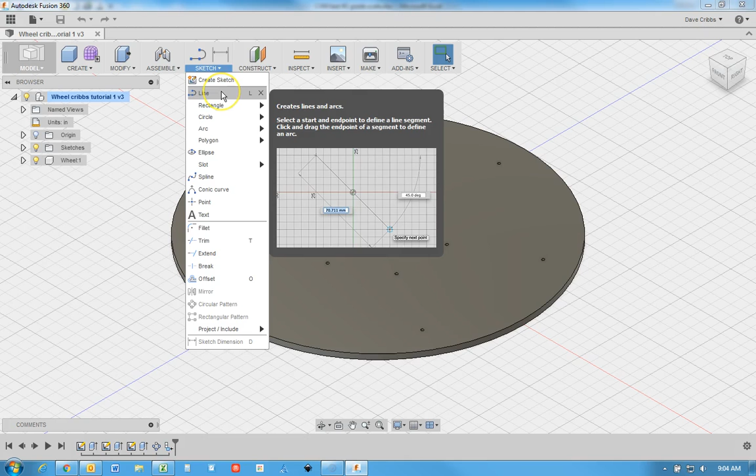First thing we want to do is create a new sketch on our drawing. We'll do it right here on the top surface. We'll go ahead and use this horizontal line as a reference. We'll start out here, go vertically upwards, come back down here at a good angle, and then back right there.

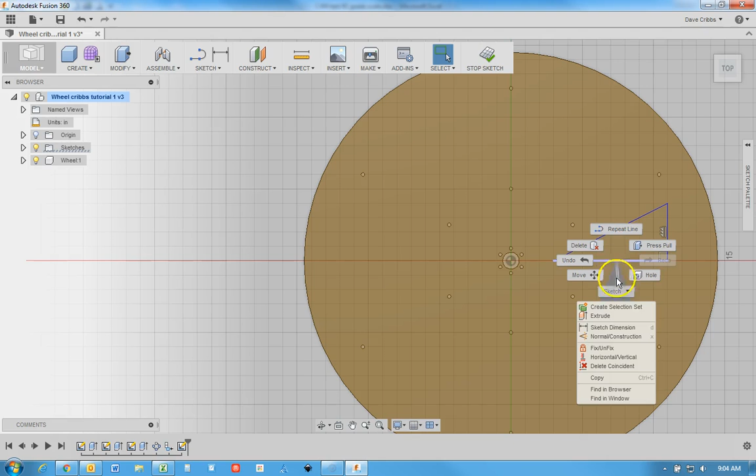Right click and hit OK. I'm going to turn this line segment into a construction geometry, and now I can use that. It won't show up as a profile line, but it'll show up that I can use it to do different things. I'm going to go ahead and mirror this line.

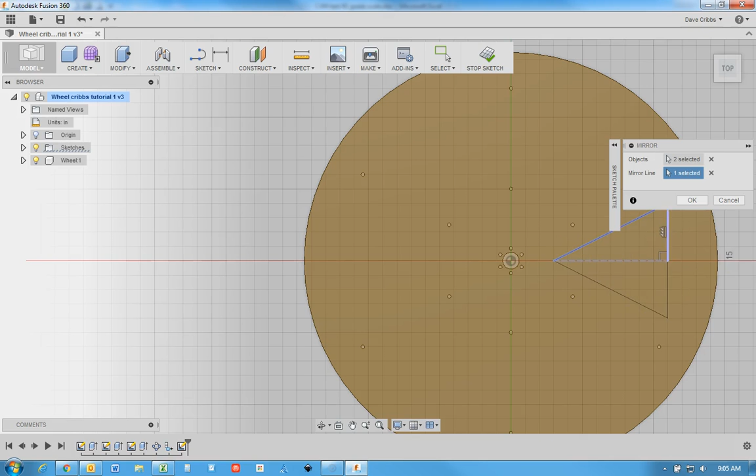Shift select this line about this geometry line. So now it makes both of those over there as well. It mirrors whatever I selected in the sketch, and I'll hit OK.

So now when I select this, this is just one volume. This is just a reference line. The sketch doesn't see it as part of the profile. So now I can hit Stop Sketch.

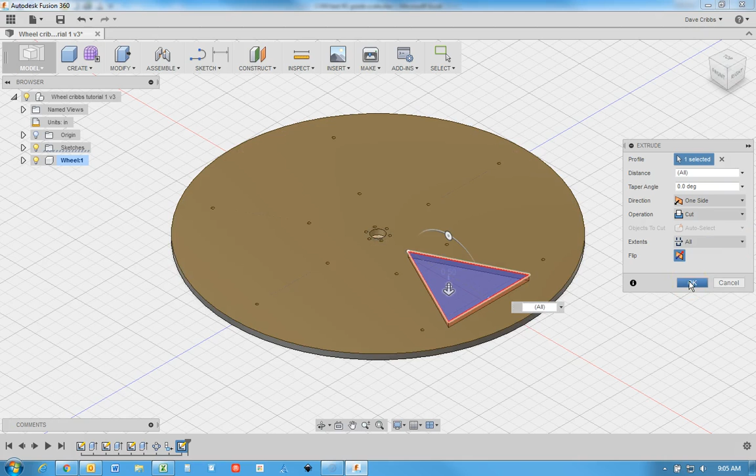I can select that geometry, right click, and do Press Pull. I want to go through my wheel. I'm just going to go through all sides, that way if we change the thickness of the wheel, this will go through. I'm going to hit OK.

The next thing I want to do is create another circular pattern. It asks me for what I want to select. I can come down here and select that extrusion, and I'll do pattern features is what I need, and select that extrusion. The axis will be the center axis of the wheel. I want to do 6 of them, and then OK. So there's all the spokes in the wheel.

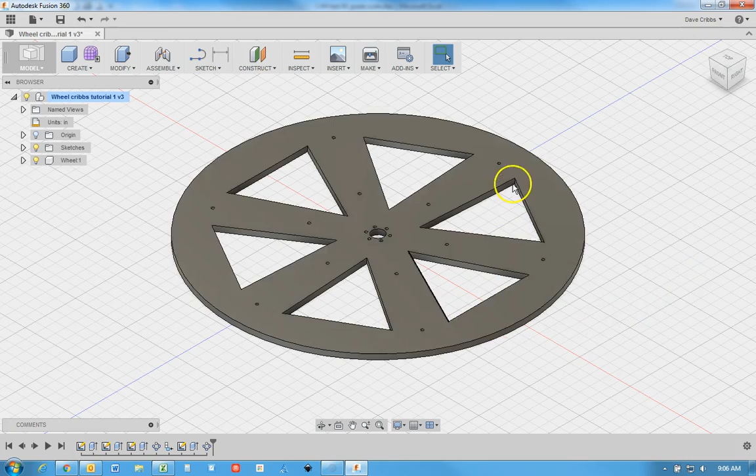You can come in here and add fillets to all these corners. I'm actually going to go ahead and delete that circular pattern.

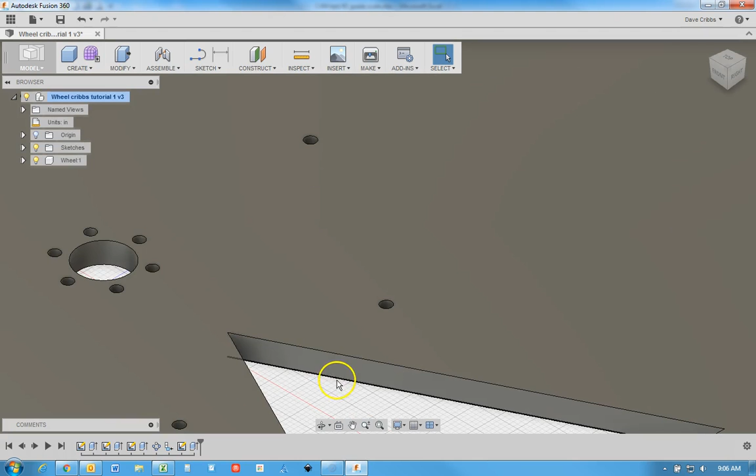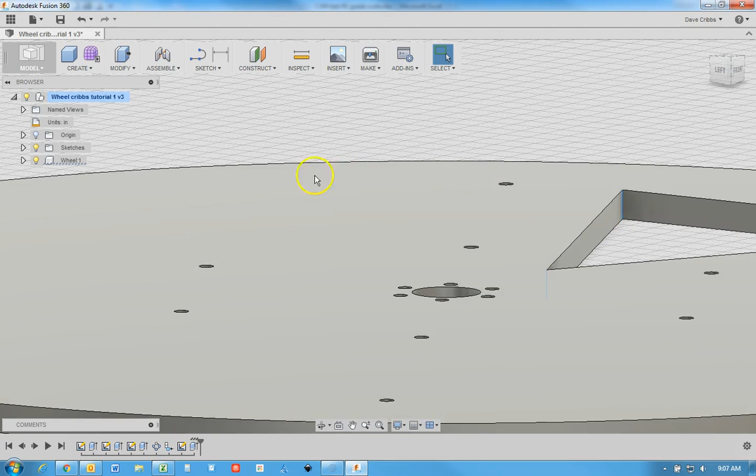I'm going to add the fillets to this before I make the pattern. I want that line right there, that vertex, and then this vertex. Once I have all 3 of those vertexes, I can come in here to modify, do the fillet.

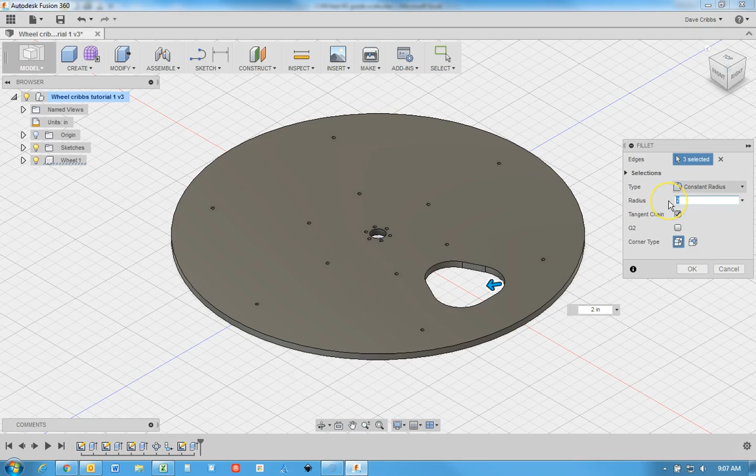We want a nice big fillet, we'll say maybe 1 inch. Let me come back up here to my view cube so I can see what that looks like. We might have even done 2 inches. Maybe too much, 1.5 inches. Okay, we'll just leave it like 1 inch. We'll go ahead and OK.

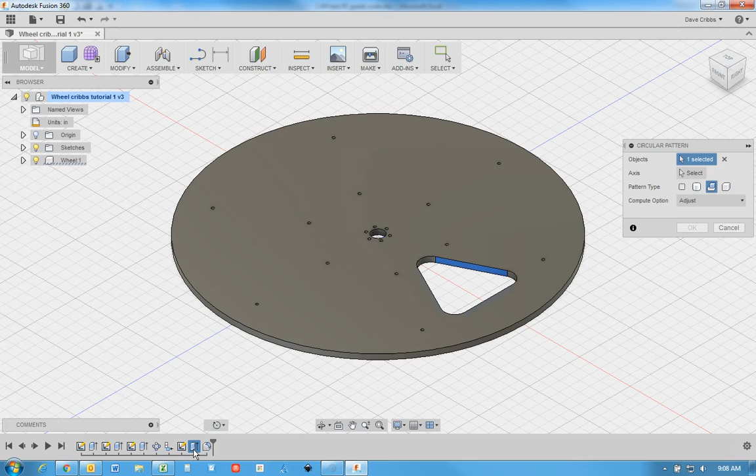The important idea is just to know how to do it. So now we'll come back here again to create our circular pattern. I want to select not only the extrusion, but I want to shift select the fillet as well. I'll select the center axis, do 6 of them. There you go. Now it's already got the rounded profile.

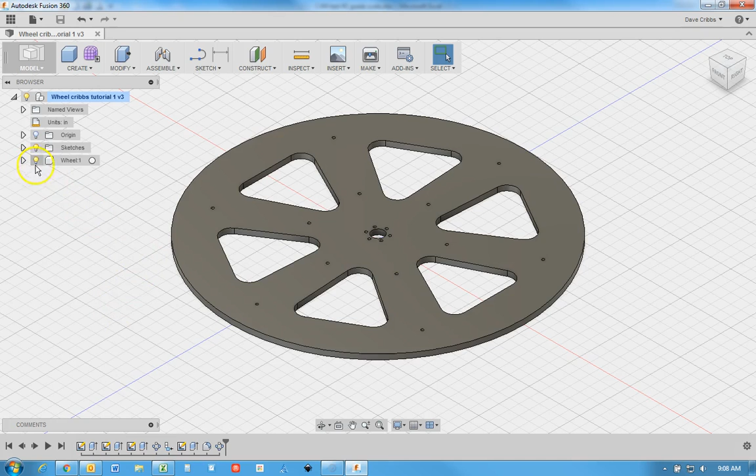So go ahead and hit save, save the new version of this. The other thing I want to do, this is already a component, so that's good. I'll select it over here. I can right click.

Come down here to the option to do create new drawing. It asks for the size paper, 17 by 11. It's not quite going to be big enough. Actually, that's fine. If you were going to use a laser cutter, you'd want to do a much bigger sheet, a size E, so it can be a 1-to-1 size, but on our drawing, we're fine doing 17 by 11. That's a good size.

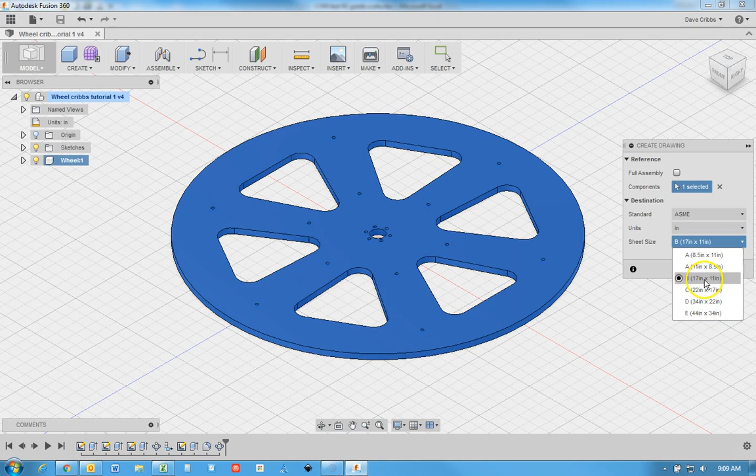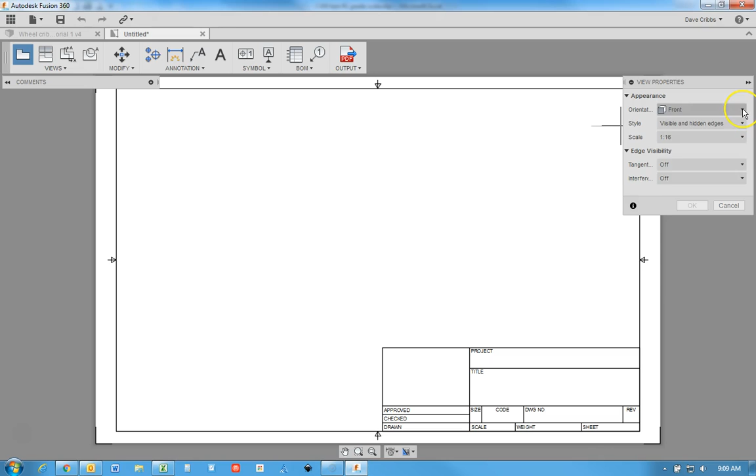So I hit OK, brings up a new tab where I have the drawing. First thing you want to do, the base view is automatically selected. You want to do an orientation. This is the front view. You come down here and pick one of the isometric views. It's nice to have an isometric image, it's kind of an angled view of your object.

I want to do this a little bit bigger, right there, and click to place that.

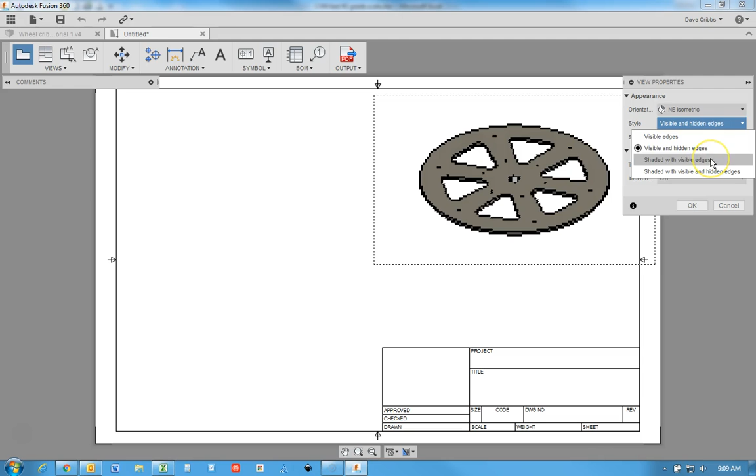Style, I'm going to do shaded with visible edges for my style. Hit OK, and it gives us a nice view of the wheel.

Next thing we want to do is do another base view, but this time, usually we want to do the top, the front, and the right view, but since our wheel is a circle, the top view will be the circular view.

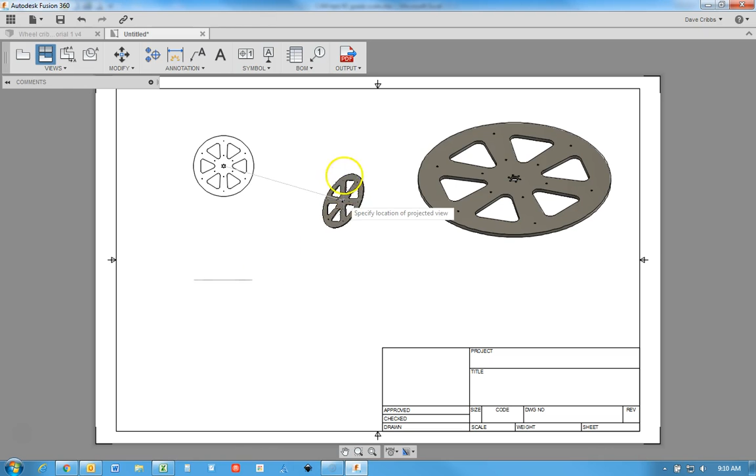If I select OK, now I can come off of here and do a projected view. So I'll take that top view, and then when I project it, that's going to be the side view, and if I come over here horizontally, that's the vertical. But the deal is that this view and this view are identical to each other. So I'm going to right click and hit OK.

Take my cursor and delete that one. When I look at this, I'd like this a little bit bigger. So I'm going to right click and hit Edit View. I'm going to change this back to the 1 to 5 as well.

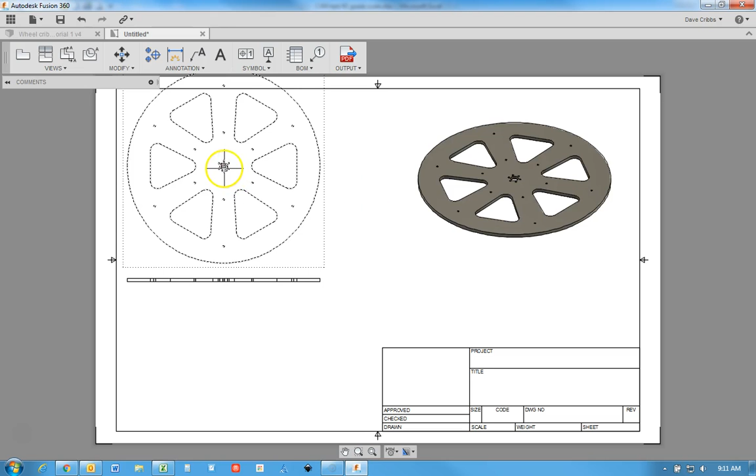I'll select this and grab the center, move it down a little bit so it fits on the page. Then I got to grab the projected view as well, move that down, and it'll snap to vertical.

The next thing we want to do is put some dimensions on here. We can add, let's actually add a bill of materials first. The bill of materials will come... oh, never mind. Let's go ahead and just do dimensions.

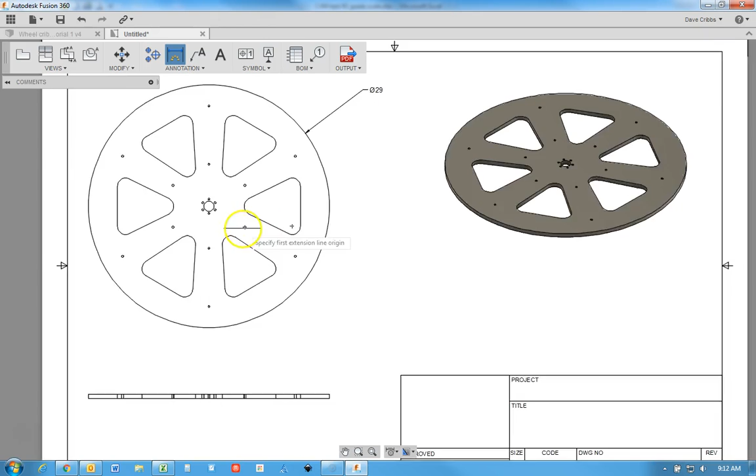We'll come in here, put the outside dimension of the wheel. We can zoom in, put the...

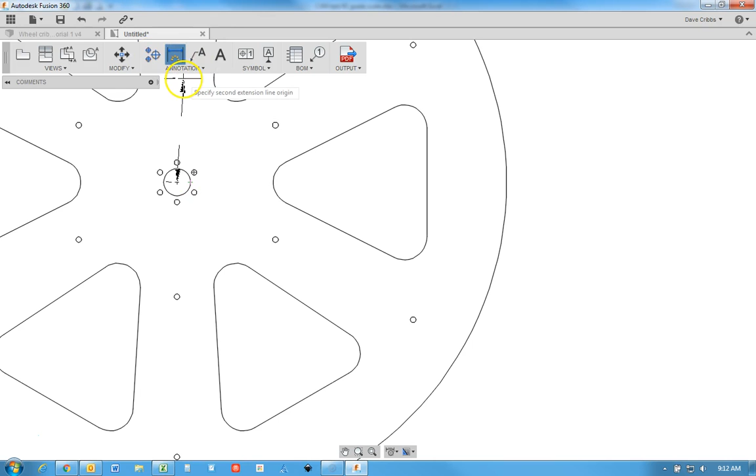Let's do a dimension between where I click, which is not what I want. I want a dimension of the diameter of that wheel. And it's not being nice. There you go. Right there. Now it says specify circle diameter. That's what I want. I can put this wherever I want to.

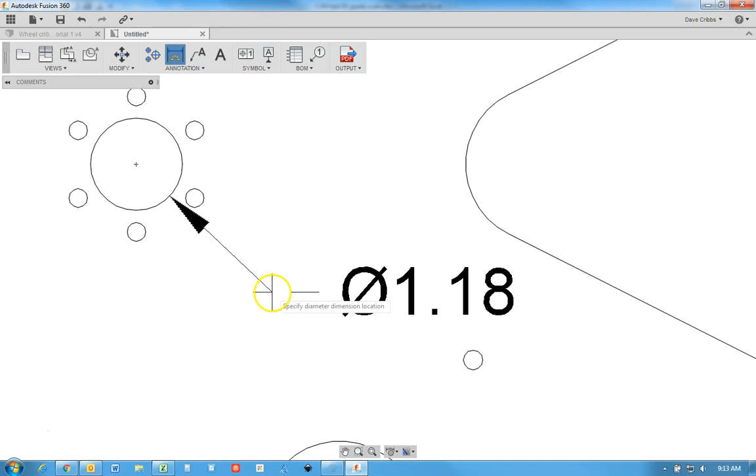To zoom in on here, specify that diameter. Those are the diameter of the holes. Those are the important parts.

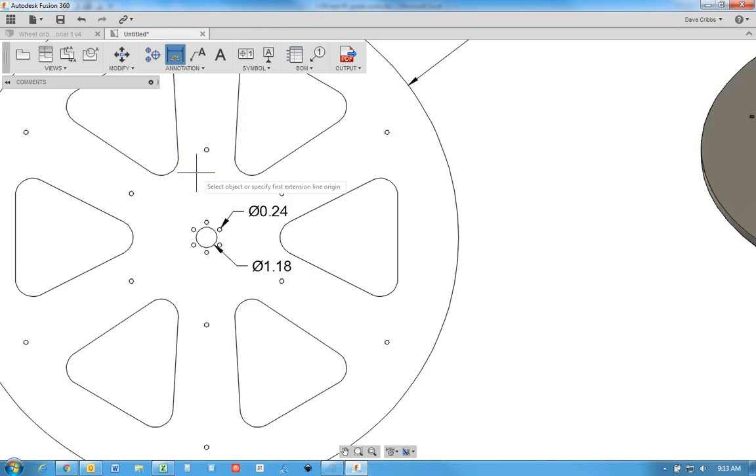We can come up here and measure from the center of this hole to the center of that hole. That's 5 inches.

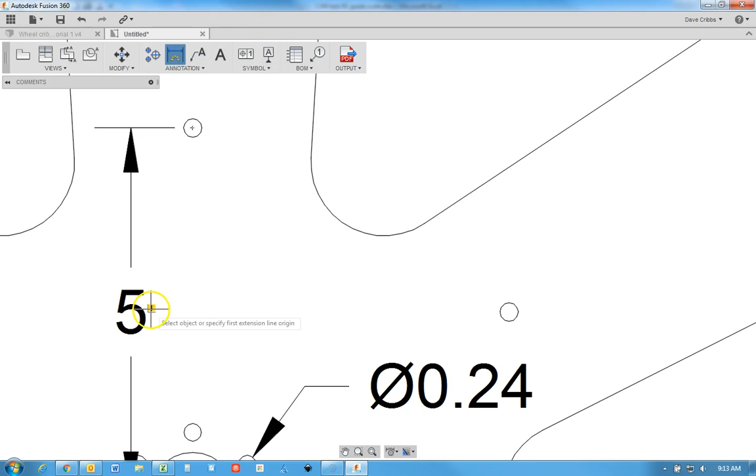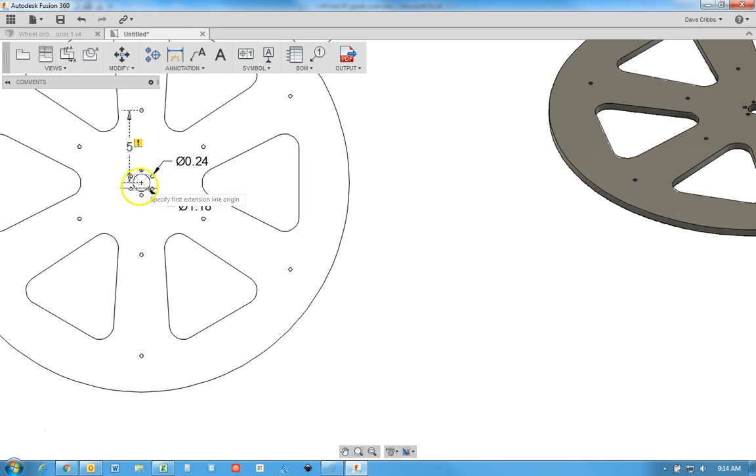And then from the center... I'm not sure why this is giving me an error, it's really odd. We go from the center of one to the center of the other. Maybe it doesn't like the fact that I moved it off to the side. Okay, well, it's happy now.

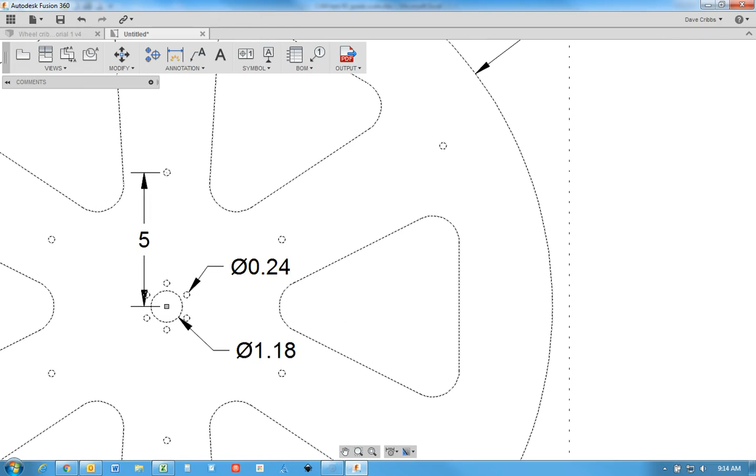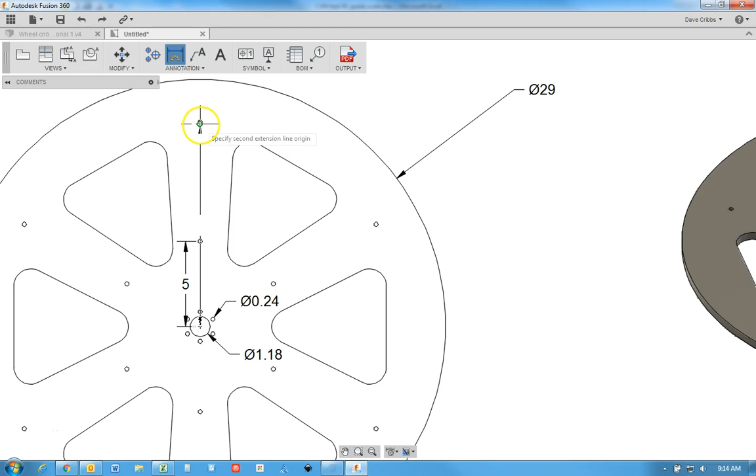I'd like to try to go from this line up to this hole as well. But it thinks I want to move it. So we'll use Control Z. Go back to our dimension tool. Up to here. Zoom in a little bit. And place that one. It's giving me an error as well. I'm just going to go ahead and leave it.

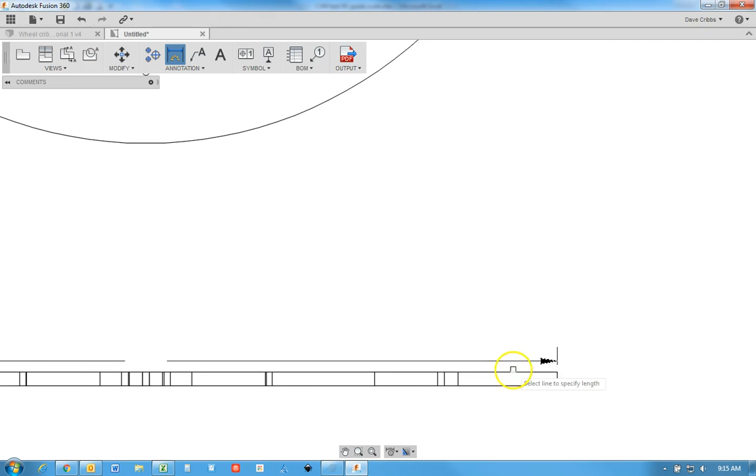So I've got the distance that the two holes are away from the center. I've got the size of all these holes and the diameter of the wheel. That should be fine. Come down to this one, and all we need down here is to go from the top to the bottom and show people how thick that is. That these are half inch thick.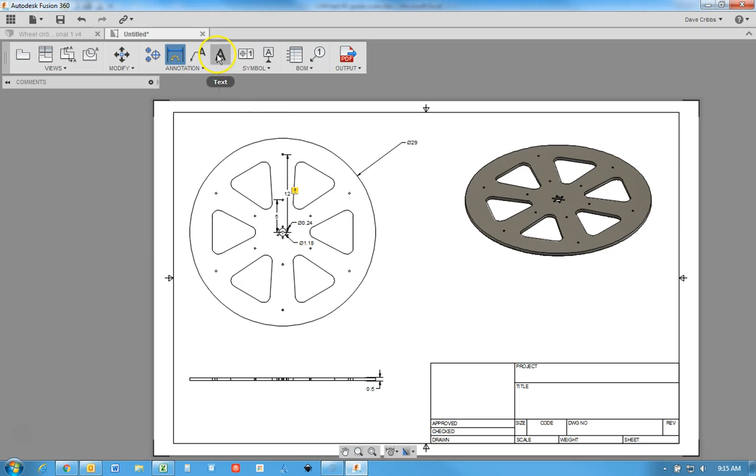So now if you zoom out, we've got all the important aspects of the wheel labeled. Now you can come in here for text and fill in the text portion of this wheel. It says specify first corner, drag to the opposite corner. You can put whatever text you want in here. Rover wheel, and hit enter.

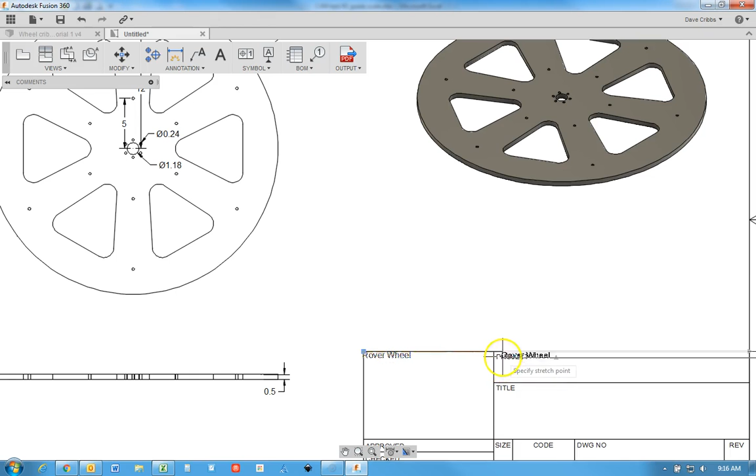And then that's not necessarily where I wanted it. Click once, and you can kind of drag it to where you want it. If you double click on it, then you can edit the text as well. So you can put the project, Rover wheel, title. Just go ahead and put your name in this area.

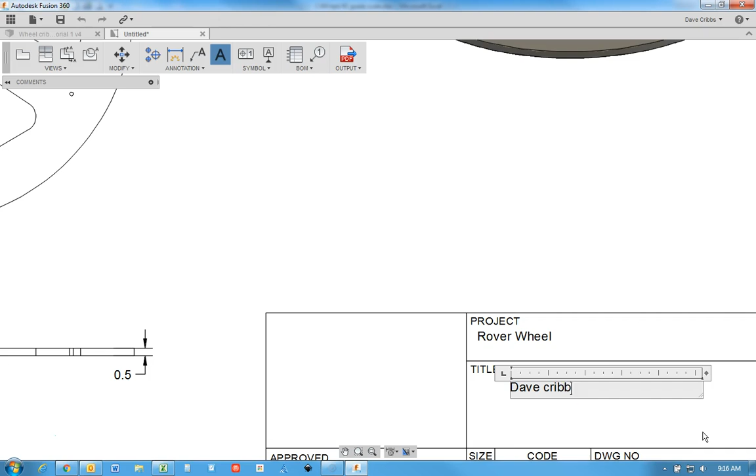If I drag a box, until it's a text box again, I'll put my name in here. Alright, and that should be good. I'm going to make sure we save our work. Well, that's a great name. We'll go ahead and hit save.

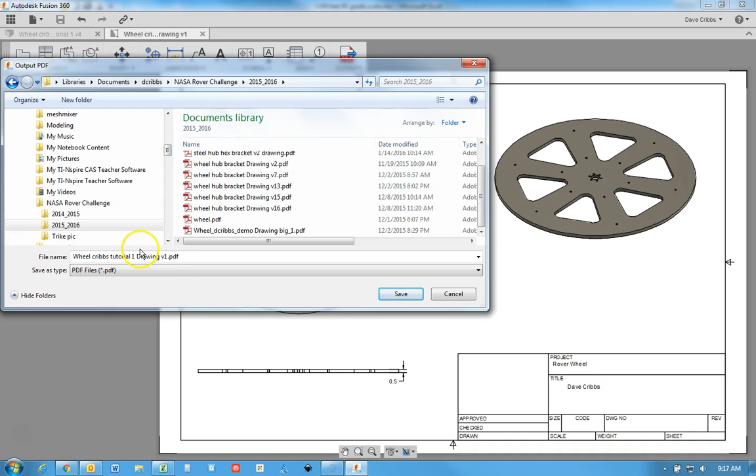Okay, so it's saved. The last thing you need to do is come up here to output and you create a PDF. This is what you're going to post to your student notebook page. Save this to somewhere where you can find it. Hopefully you've got a folder for your Rover Challenge stuff. I'm going to put mine right here. And then you'll be able to go back, find that PDF, and post that to your student notebook page.